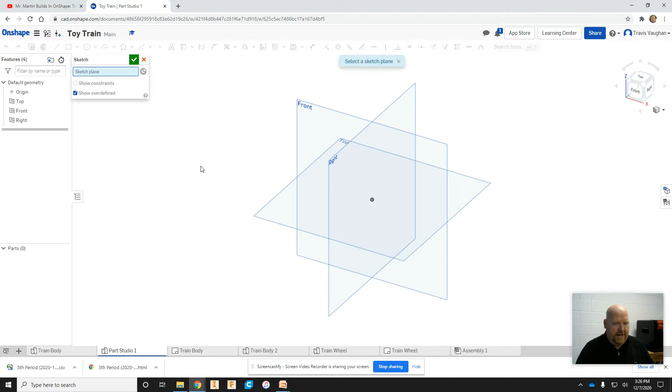Okay, so this is our part studio. This is how it's going to launch. And the first thing we're going to do is we're going to hit Shift S to start a new sketch. We're going to choose our front work plane, and then we're going to swing around our front view cube or our view cube to the front view.

All right, let's jump over here to the train body, the drawing. Sorry, had to reload it. So here we go. So first things first, I am going to draw the outline of my train body first.

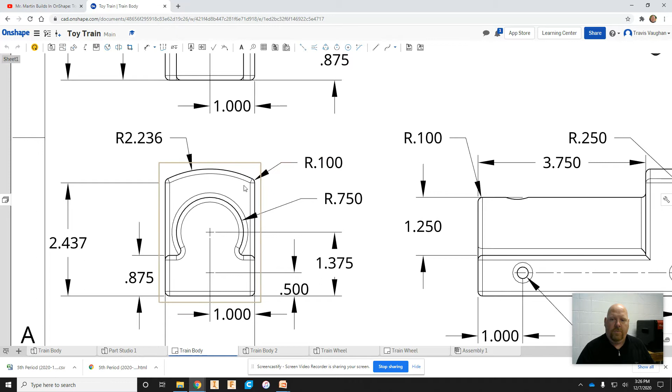All right, so now the dimensions that I'm going to use are not fully going to match what is on this drawing because, as you can tell, there's a radius here of 0.1 that's telling you that fillet there is 0.1 inches, and that is going to affect this measurement right here, okay, because this one is 0.1 as well, which means that this is really 2.5, not 2.437. It will end up being 2.437 once we add the fillets, but for the time being, when we're drawing it, we're going to draw it as 2.5.

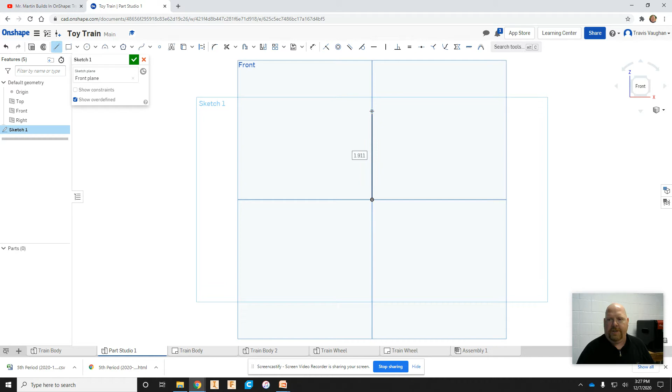So 2.5 up and down, 2 inches across, another 2.5 up, and then we'll add the arc at the top. So I'm going to grab my line tool by choosing the letter L on my keyboard, starting at my center point, and I'm going to go straight up that center line. Don't have to go far, just enough to get it started, and then I'm going to type in 2.5, and it's going to set my line.

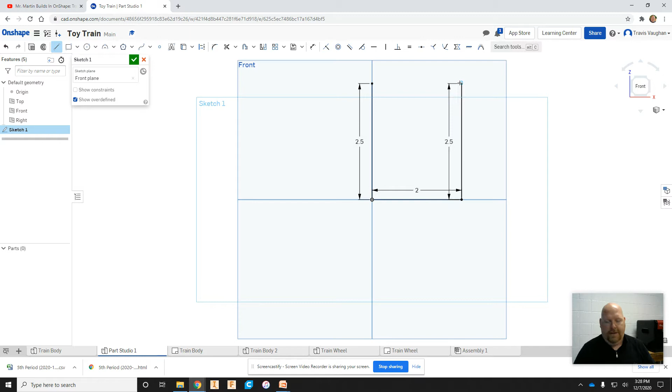I'm going to choose my line tool again to get rid of it, and then I'm going to grab down here at the bottom. Make sure that your center point turns yellow to let you know that you are connecting the dots. Go straight across. I'm going to make that 2. I'm still in my line tool, so I'm going to go straight up until I get around 2.5, and then I will type it in, 2.5. Hit escape to get out of my line tool. I'm going to drag this down.

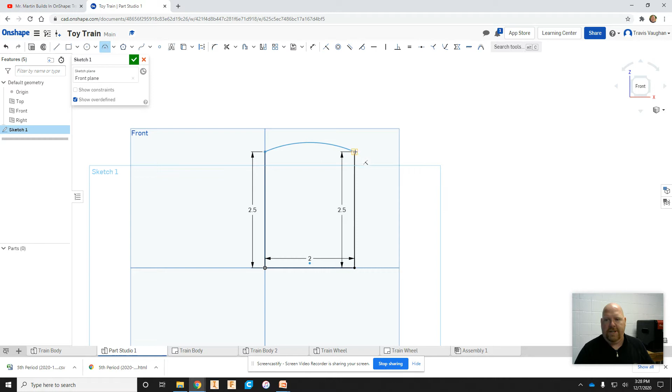Now what I want to do is I want to create the arch that goes across the top. So I'm going to hit the letter A to choose my center point arc. Excuse me, my 3-point arc. That's what we want, 3-point arc. And I'm going to choose this as my first point. I'm going to choose this as my second point, and I'm just going to drag it to right about there, hit escape, and now we've got our general shape, but I need to make sure that I'm exactly like my drawing.

So this point here is my 3rd point. So I'm going to come back over to my train body diagram, and I'm going to look, and I'm going to be able to see that this center point is connected to my arc. Okay, and it tells me, according to this drawing, that that center point is 0.5 inches from the bottom of my train. So I'm going to come back over here.

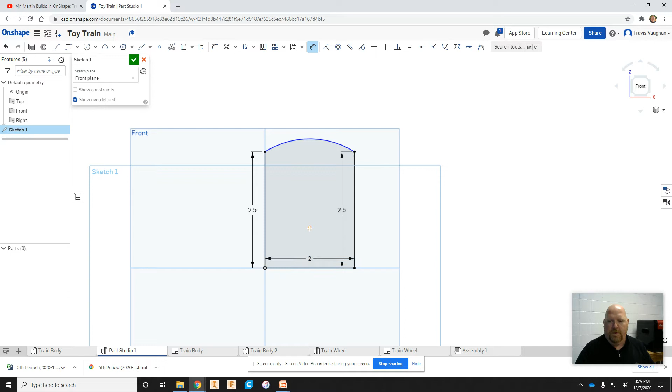I'm going to choose the letter D on my keyboard, and I'm going to dimension from that center point to the bottom. I'm going to pull it out here to the right, and I'm going to tell it 0.5, and it is going to set it. And now my arc is the shape that I want it to be.

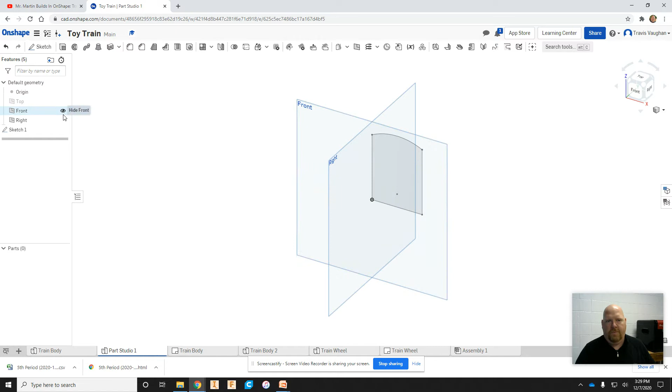We are done with this shape, so I'm going to finish my sketch. I'm going to go into isometric view, and then I am going to get rid of my work planes because I won't need them anymore. And I'm going to extrude, so I'm going to click extrude, and I'm going to click that.

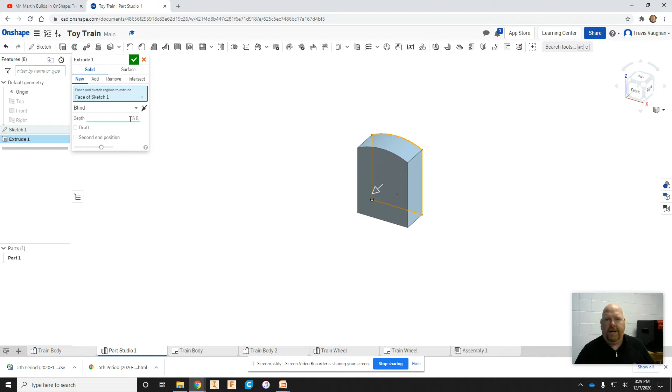If you paid attention just a minute ago, you would have noticed that the length of our train is 5.5 inches from front to back. So I'm going to tell it I want it to extrude 5.5, and I want it to go this direction instead of coming towards me. I'll click the opposite direction button, sending it backwards instead of forwards. This is the direction I want it to go, so I'll click that and then click OK. We are done with that part of our train body.

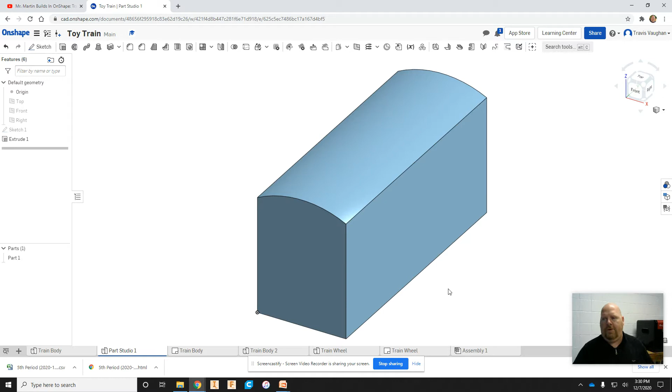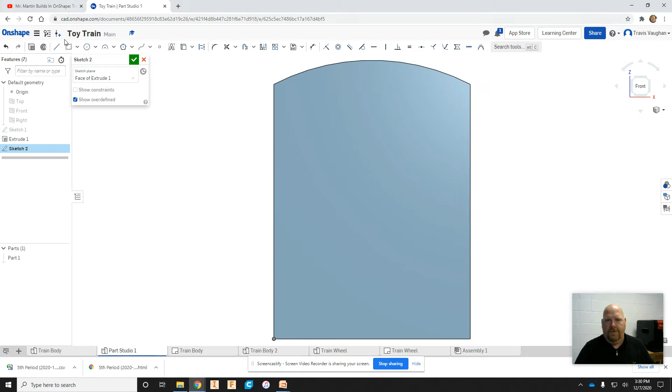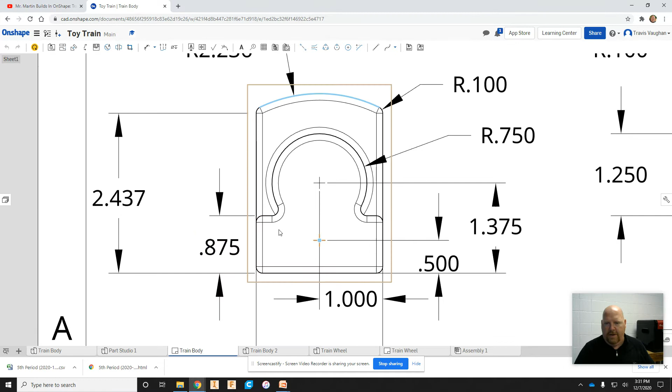I'm going to draw a line, choosing my line tool, and just draw a line straight across from one side to the other. It doesn't matter where, because I'm going to dimension it anyway, so I'll hit escape. I see that the height is 0.875 - if I zoom in from the top or middle of my train down to the bottom, it's 0.875, which is what I want. I'll click dimension, choose the line we just drew, choose that bottom line, and when it turns yellow, enter 0.875. Now we're good to go.

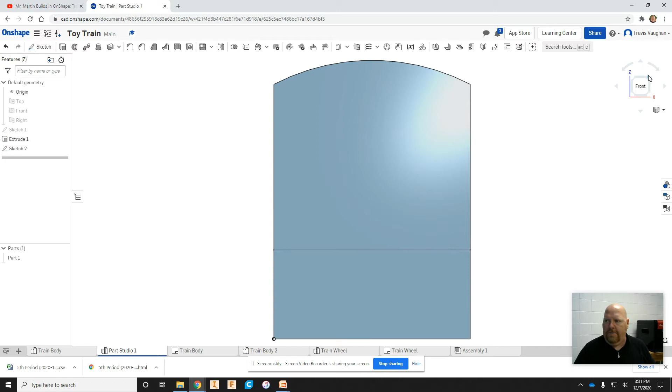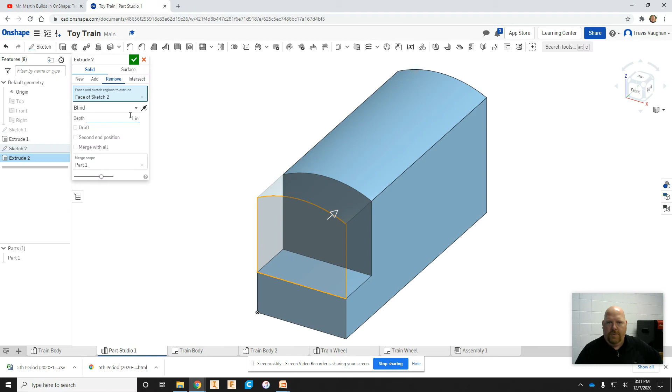Hit finish sketch. I'm going to slide over here, send it into isometric, and extrude this. Instead of add, I'm going to remove, but I need to know how much material to remove, so I'll come back to my drawing. 3.75 inches is how far it is from the front part of my train back to this wall. So when I extrude, I'm going to tell it to cut away 3.75 inches of material. I'll hit enter, and we are now starting to look like we have a train body.

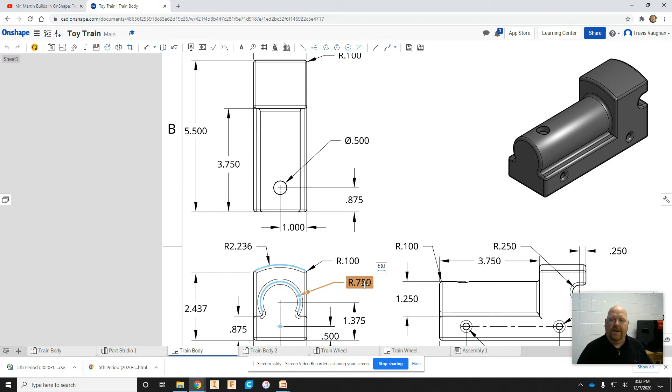Go back to isometric, come back over here, and it's time to build the steam chamber. Looking at my steam chamber, the first thing I notice is it's a circle, but not just a regular circle - right now I'm given a radius. Remember, when we're drawing circles, we have to draw diameters, and a diameter is equal to 2 times the radius. So if our radius is 0.75, then our diameter is going to be 1.5 inches.

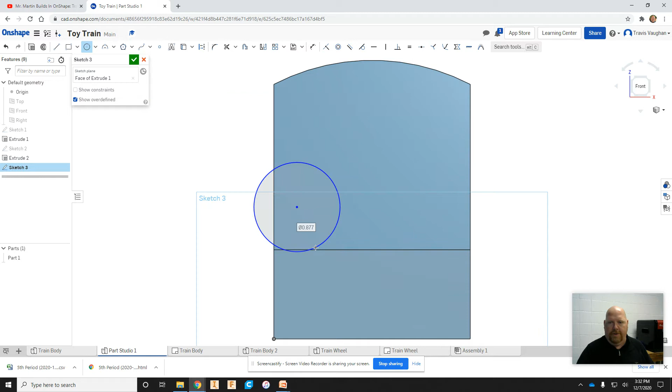We're going to draw a circle, but first we'll start a sketch, choosing the front of my train again. Then I'll click the front of my view cube to spin it around, and draw a center point circle. It doesn't matter where I draw it, because I'm going to tell it where to go anyway, so I'll draw it and tell it to be 1.5 inches in diameter. Now I'm going to set up where I want it.

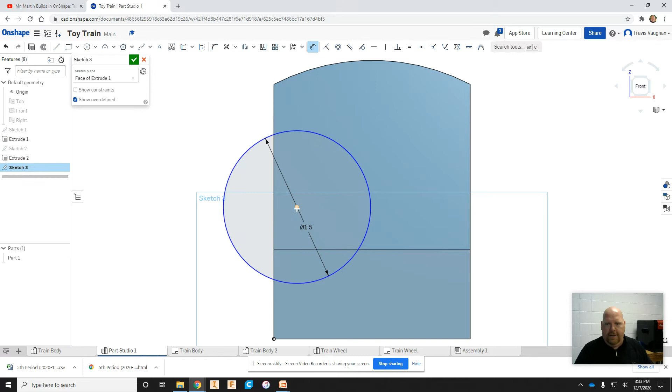According to this, my center point of this circle is 1 inch from the side of my train. So I'm going to click my dimension key, go from the middle over to the side, come out and tell it 1 inch, and it's going to automatically center that thing up for me.

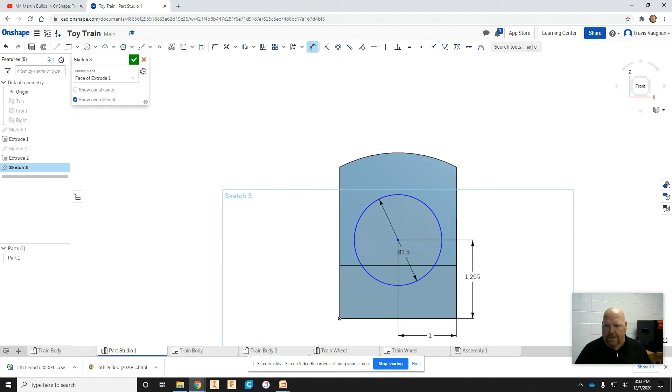Now, how high does it need to be? Well, according to this, it's 1.375 inches from the bottom of my train. So again, I'll click my dimension tool, center point, bottom line, come over to the side, and enter 1.375. Let me double check that... yes, that's what we want. Once we've got that, we can click Finish Sketch because we are done drawing our circle.

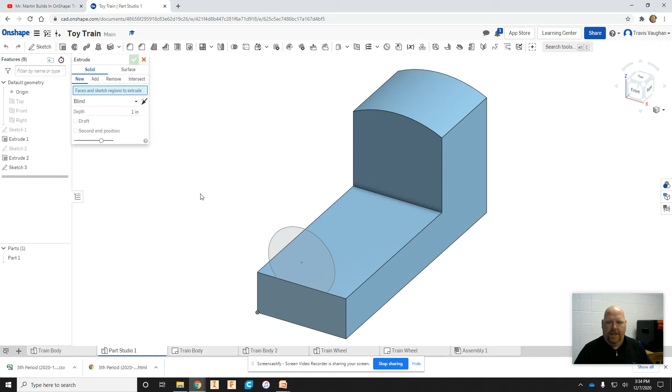I'm going to spin it back around into isometric mode, and now I want to create my steam chamber. So I'll click Shift E for my extrude, and select that circle that we just created.

I'm going to tell it to go the opposite direction because I want it to come back and hit this wall, but I want it to stop there. So instead of choosing blind, I'll tell it up to next. It's going to get to that wall and stop, and I'll hit OK. Now we have a pretty good looking train body so far.

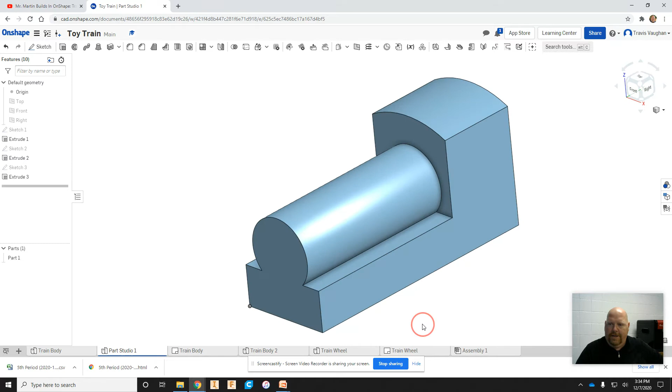This next step isn't complicated, but it could be the most confusing. The next thing I want to do is draw the hole for my smokestack. This is where my smokestack is going to be inserted.

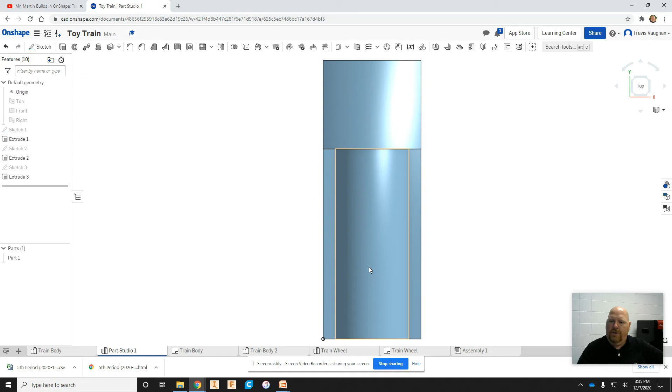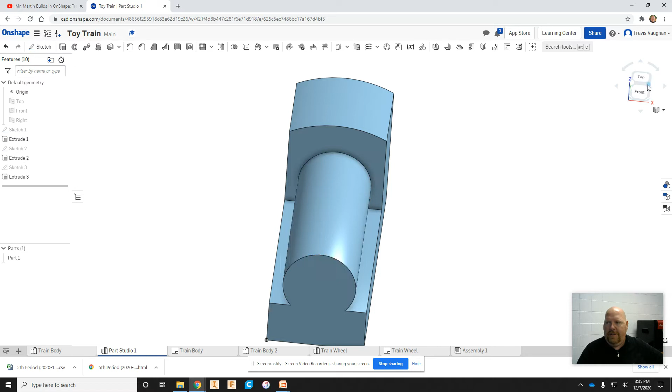If I come over here and grab the top of my view cube and tell it I want to create a sketch on this surface, the problem is if I spin this up a little, you'll notice that depending on where I click on this top, while it looks like a rectangle, I'm actually clicking at a different height depending on whether I go left or right, because it's a cylinder, not a rectangle. So I need to give myself a flat surface to draw or sketch on.

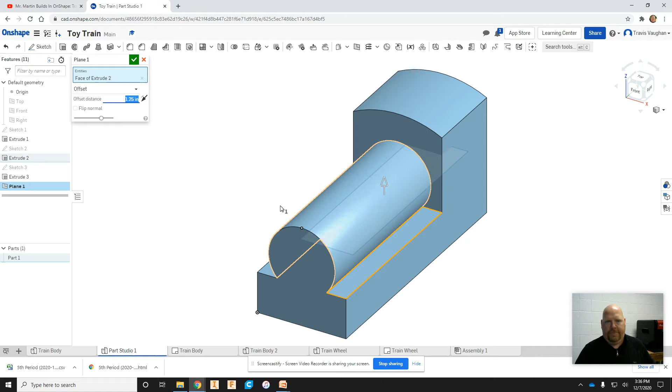So I'm going to create an offset work plane. I'll choose my plane tool from up here at the top, then come in and click on this flat surface right here. When I do, it's going to create this work plane, but I want to make sure it is at the top, 1.25 inches from the top of my cylinder. I'll click the checkbox.

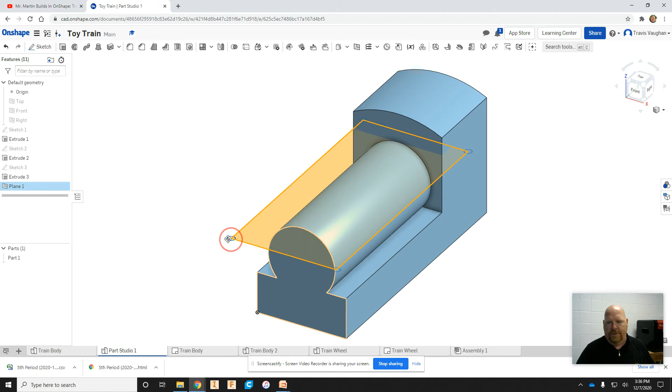Now I need to make sure this plane is big enough that I can see it and grab it, and make sure my sketch goes on there. So I'll choose my work plane, Plane 1, from my features panel, grab that corner, and drag it out. I'll do it again down here until I get a nice big orange square. That will allow me to make sure I select the plane I want when I create my sketch. So I've got my work plane created.

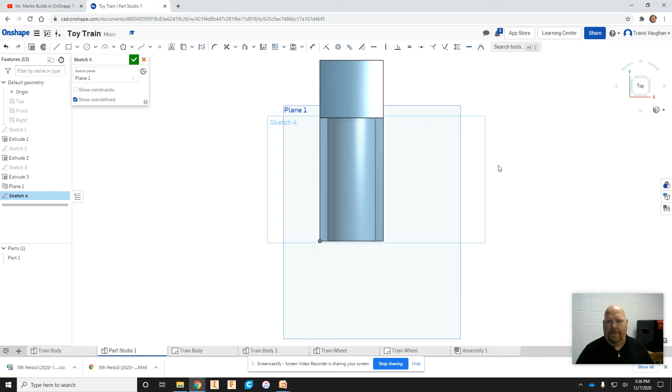I'll click Shift S, click on that work plane, and flip over to the top view. Now I'm ready to draw that circle for my smokestack.

I can see that the diameter of that smokestack is 0.5 inches. So I'll click C for my center point circle, drag it, and set it to 0.5. Now I need to dimension it and put it where I want it to be.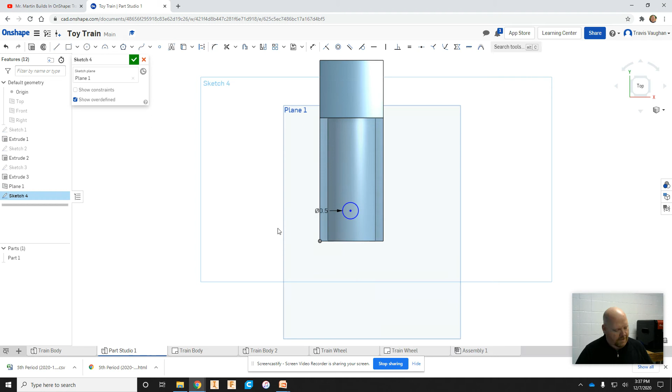I know it is 1 inch from the side and 0.875 inches from the front of the train. I'll start with the 0.875 since it's going to be the hardest for me to remember, so I'll dimension it from there to the front as 0.875.

And from that center point over to the side of my train is going to be 1 inch. It is completely centered up. It's exactly where I want it.

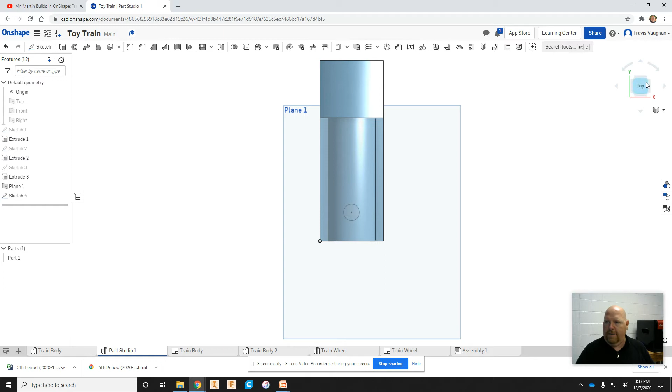I'll hit my check mark, then send it into isometric mode. I'm going to extrude it down inside and tell it to remove 0.25 inches of material. That's the one thing on the dimension drawing I wasn't able to show you — I know how to do it in Inventor, but I haven't figured it out in Onshape yet, so that's why I'm giving you that dimension instead.

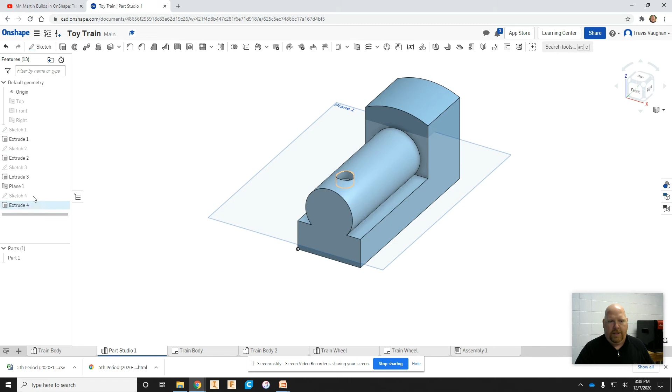So we have that done, it's where we want it. Now we're going to make that work plane invisible so it's not in the way anymore, and we need to cut three more holes.

We're going to cut these two holes in the side, then cut this hole in the back. We'll start with these two holes in the side — we can tell the diameter of both is 0.25 inches. So I'll grab over here and start a sketch with Shift S, starting it on the side of my train, flip around to the right side, zoom it out a little so I can see what I'm doing, and draw two circles.

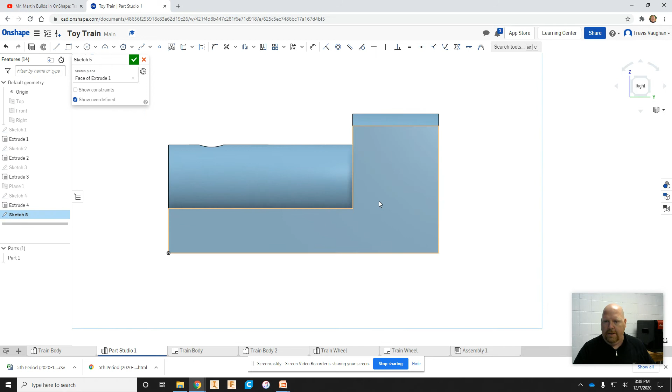All right, 0.25 inches. Doesn't matter where, because we're going to tell them where to go anyway. Looking back at our train body diagram, I can see that there's a center line running between these two circles, and that tells me that they are both 0.5 inches from the bottom of the train. So I'll come over here, hit my dimension key, and grab that, go to the bottom of the train.

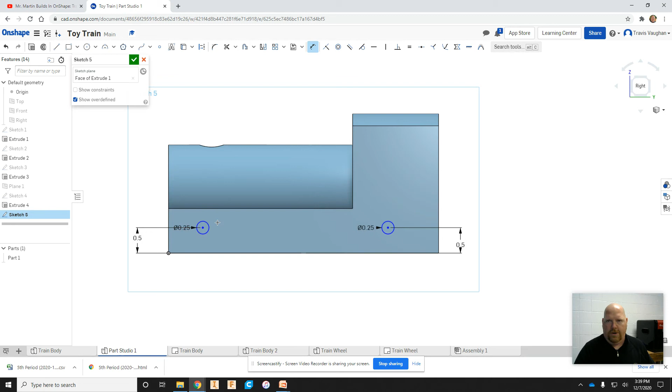0.5. Same thing with this one back here to the bottom of the train, 0.5 inches. And I look at my train body one more time, and I recognize that this front circle is 1 inch from the front, and the back circle is 1 inch from the back. So staying with our dimension tool, front circle to the front of the train, 1 inch. Same thing on the back.

Back circle to the back of the train, 1 inch. And we're done. Now let's go ahead and draw this circle up here as well, because it's going to go all the way through. So let's look at our train body one more time.

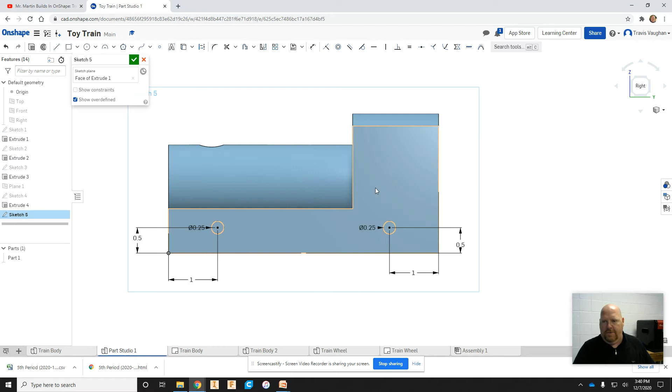And if you notice, we have a radius for this circle. And the reason is because it's not a complete circle. Okay, so when we have a radius and we're drawing a circle, we're going to double this. So a radius, in order to turn it into a diameter, you double it. So instead of 0.25, it's actually going to be 0.5. So I'm going to come back over here. I'm going to draw one more circle up here, and I'm going to call it 0.5.

And that's perfect. Now, I want you to notice one more thing, and that is it's not just a circle, okay? It extends all the way out. So the way that we're going to cut out the rest of this material is we're going to draw a couple of lines. So I'm going to choose my line tool, and I'm just going to draw a line up here. As long as it's a straight line, it doesn't matter how long it is or anything else.

So I'm going to draw a line above and a line below. They're going to be nice and straight. You're going to notice that they have a dashed mark. That means that they're straight lines. Now we're going to use our tangent tool just like we did when we were building our pear cams. I'm going to hit the letter T. I'm going to select my top line. I'm going to select the outside of my circle, and it's going to move. Then I'm going to select my bottom line and the outside of my circle.

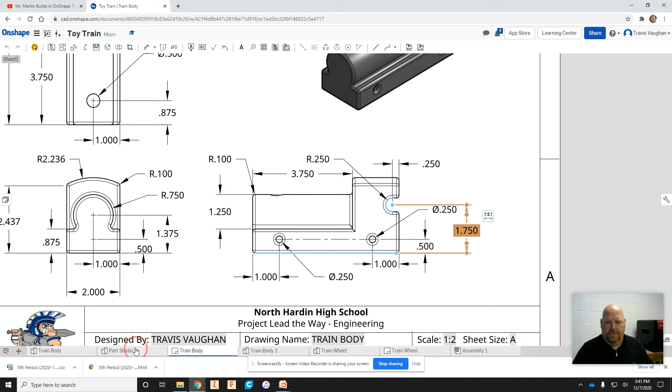All right. So we're getting to where we want to be, but I need to make sure that my circle is in the right spot. So let's look back at our train body diagram. And according to this, the center point of my circle is 0.25 inches in from the back and 1.75 inches up from the bottom. So grab my dimension tool, and from here to the back of the train was 0.25 inches. And from here to the bottom of the train was 1.75 inches.

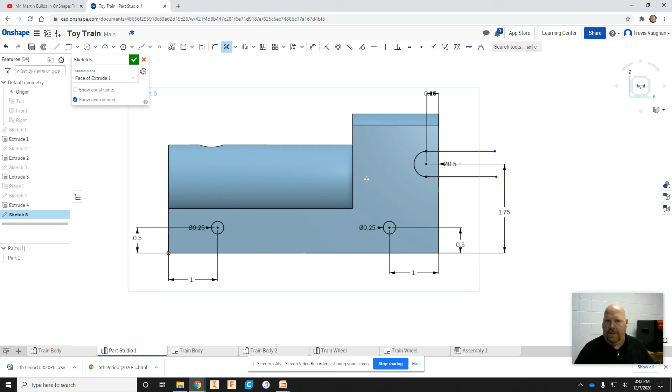Now I'm ready to trim this up and start extruding. So I'm going to choose my trim tool by clicking the letter M, and I'm going to get rid of this line and this line because I don't need those. And I'm going to get rid of this half of the circle because I'm getting rid of all of this material, not just the circle part. These two lines, I'm going to leave them alone because they're going to just go away here in just a second. So I'm done. Click Finish Sketch.

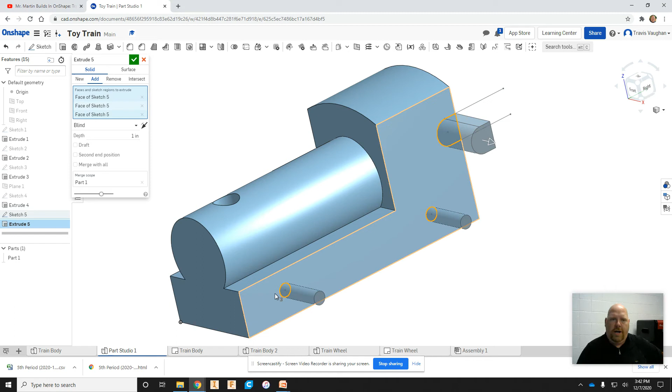Throw it into my isometric mode. All right, I'm going to zoom in just a little bit, and now it's time to start extruding. So I'm going to click Shift E, and I'm going to choose this piece. I'm going to choose this circle and this circle. And if you notice it's trying to add material to all of them, I'm going to tell it to remove. And I'm going to tell it to go all the way through. And by doing so, it cuts a hole all the way through my part, which is exactly what I want. And I'm going to hit that checkbox, and my train body is created.

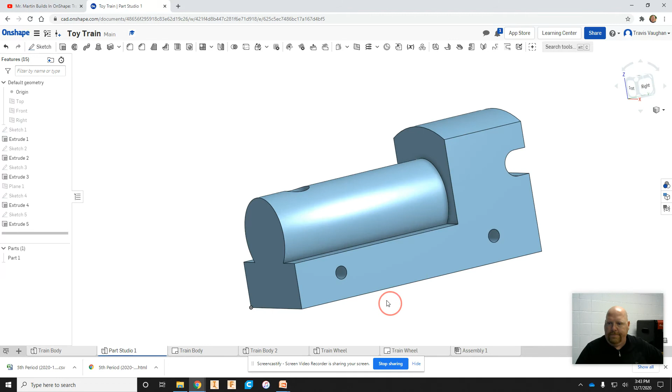You have officially created your train body. Now, there's a couple more steps that we need to do. First of all, one of the things we want to do is we want to be able to 3D print these. Okay, so our 3D printers use a material called PLA plastic. So we have to tell our model what it's made of. And the way we do that is we come over here to part number 1.

We click on it, and it highlights our whole part yellow to show that we have selected it. We're going to right click on part number 1 and choose Assign Material.

When you assign the material, it's going to ask what kind of material you want. Right now it has none applied, so we'll click on that drop box and scroll down until we come to PLA. We're going to select that.

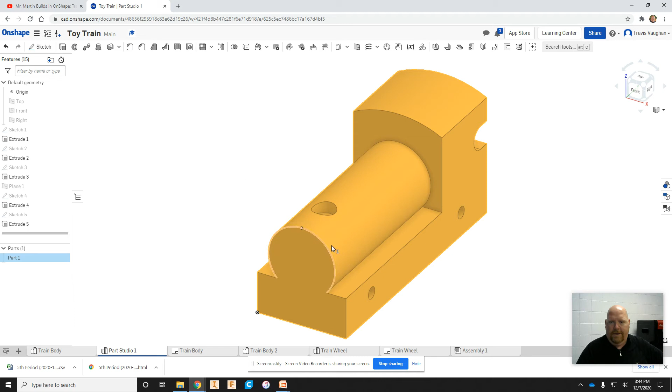We have PLA now, and it tells us our density is 0.045 pounds per inch cubed. That doesn't mean a whole lot to you, but it means stuff to the computer and the 3D printer. So we click the checkbox, and you'll notice it doesn't change anything about your part visually—it just changed some stuff in the background programming.

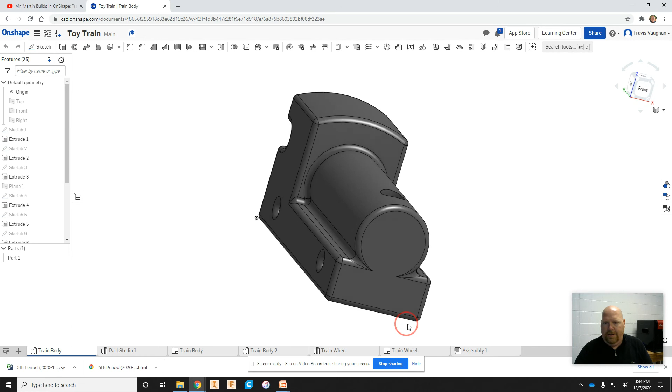The next thing we want to do is get this to the color—actually, we're not going to change the color yet, we're going to add one more detail. On my train body that I created, notice there are no sharp edges, except one right here for my smokestack, but everything else has been smoothed out.

So the last step before changing the color is to add some fillets. Your fillet tool is right up here—you can click on it or press Shift F. When you do, it opens your fillet menu, and you want to change this from 0.2 to 0.1. I'll type in 0.1 and hit enter.

Now I'm going to do this systematically. I'll do all of one side, then flip around and do all of another side, and so on. Making sure I have 0.1, I'll start with the front of my train.

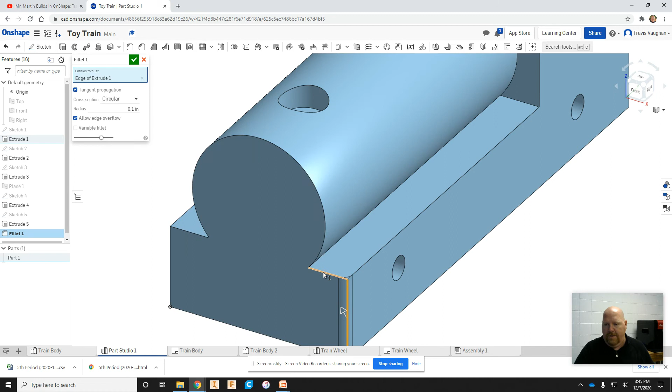I'll zoom in here a little bit. I'll grab this corner, click it, and it automatically fillets it. Then I'll grab this corner, and it fillets that too. I'll spin it around, grab this bottom corner, and it fillets that. Same thing on this side—click it, it fillets. Then I'll add one more right here. Now I've filleted all of that.

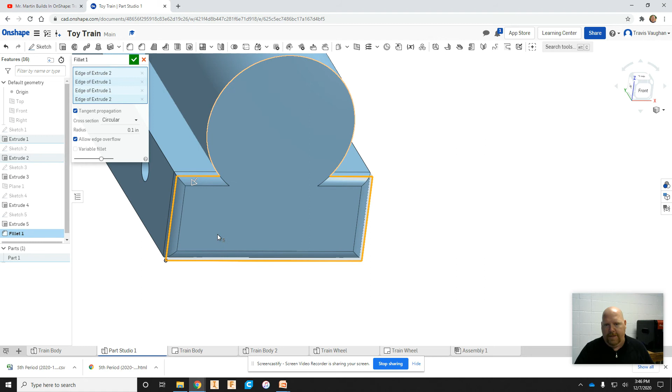Now I'm going to do this arch right here. I click it and it gives me a nice round front edge. The front of my train is done. I'll zoom out a little so I can see it—I like the way the front edge looks. So I'll hit the checkbox.

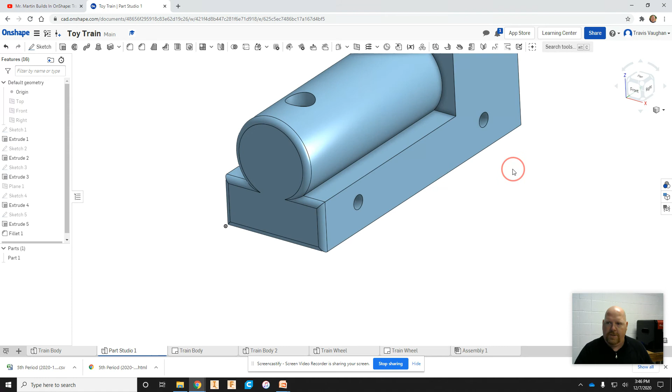Now I'm going to move to the side. I'll start by doing this side here. I'll choose my fillet tool again, Shift F, double check that I still have it at 0.1, and start doing my edges. You don't want to get the whole thing—if I click right here, it's going to mess everything up. So I want to make sure I'm only selecting one edge at a time.

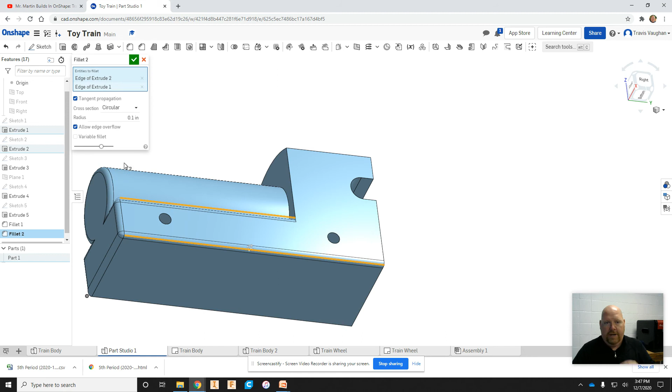So I'll choose this one first, then flip it up just a little bit so I can see the bottom edge, and grab it. Click—that's 2—and you'll notice every time I click something, it adds it to my fillet. That way, if I ever have to go back and make changes, I can make changes according to what I did. So I'll be very meticulous in how I do it.

So now I'll choose this corner, and then this corner. You're going to go around, and you don't have to click the same corners in the same order as I do, but you do want to get all of your corners.

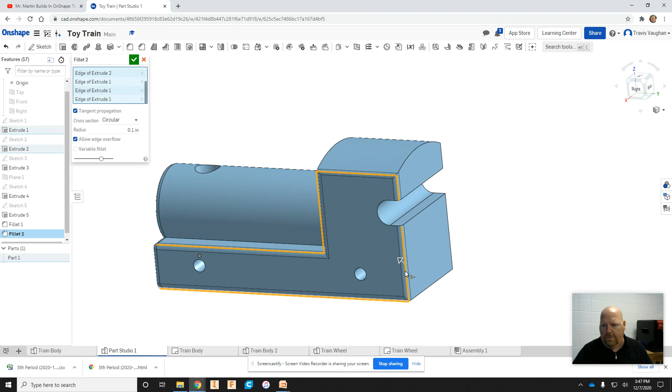Now watch this—when I get here, I'll zoom in a little bit. I'll click this right here, and it automatically does the entire thing. That was nice and handy. I like that. This side is looking really good, but the last thing I'll do is go ahead and do these 2 wheels.

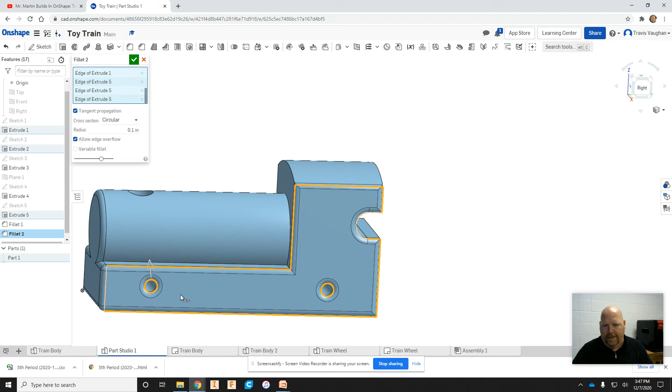All right, so I've got this whole side done and my wheels. I'll hit the checkbox. Now I've got my front side and this side over here. So I'm going to spin around and I'll do this side next.

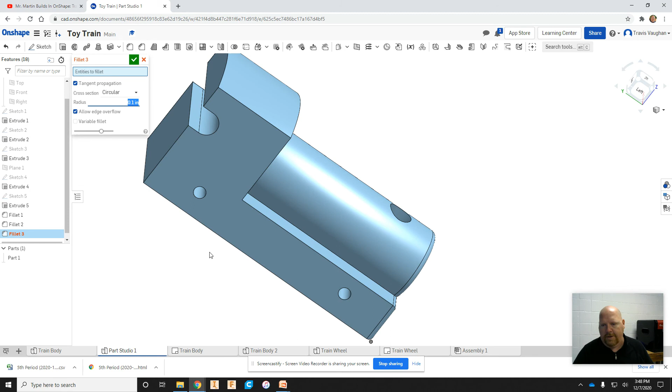Choose your fillet tool, Shift F, double check that it's 0.1 in radius. As soon as you've got that, you can start going in and doing your filleting. So I'm going to start with this corner again, then spin it up a little bit and grab this bottom corner, spin it around. The way I'm spinning this around is using the right button on my mouse.

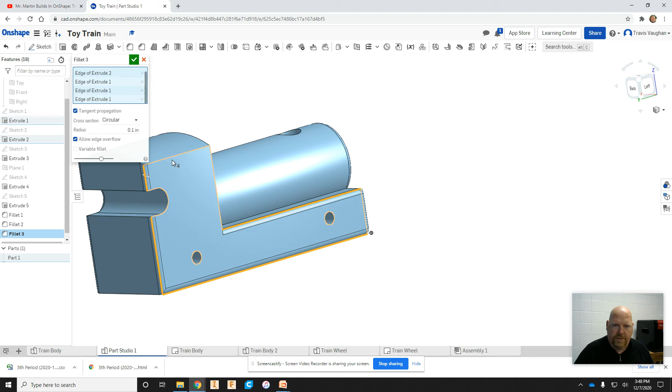I click it and hold, and that allows me to spin my part. So I'll choose this one, this one, this one. I'll spin around to make sure I'm getting this front right here. Then I'm going to spin around, zoom in so I can see that I'm grabbing this corner here, and it's going to fillet that whole edge.

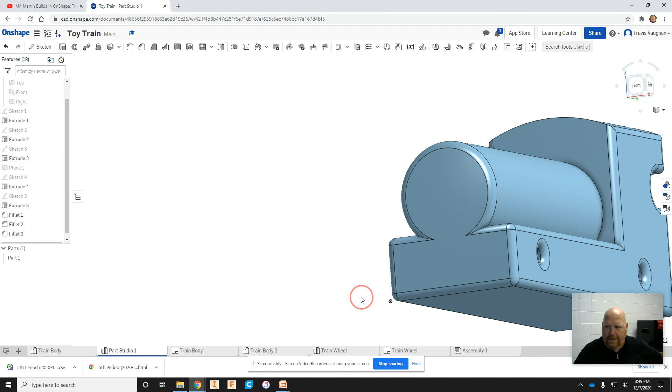And I can zoom back out, and now I can see that I've got the right side, the left side, and the front. Now I'm going to go ahead and do the top, this part up here.

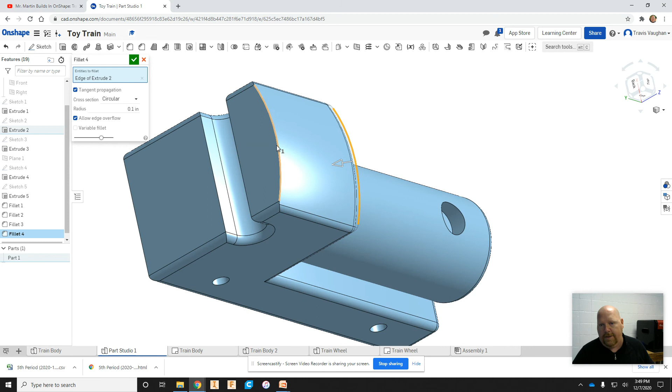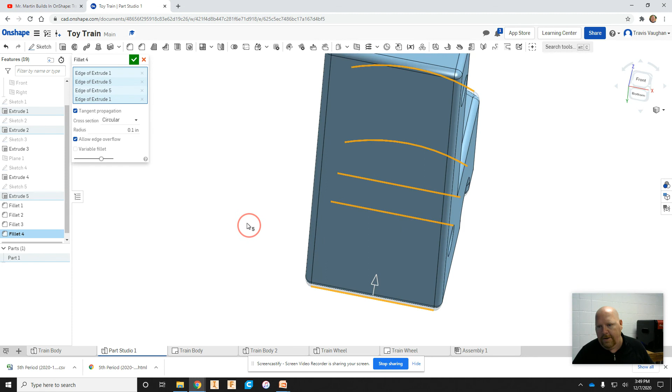Choose my fillet tool again, Shift F, change it to 0.1, and get this edge here, spin it around, get this edge here, spin it one more time, make sure I'm getting this bottom edge, so I'll click that. And I want to get this edge because I haven't gotten it yet, and I haven't gotten this bottom corner, so I'll get it. So now I've got this whole front, whole top underneath.

I should have done this earlier - I'll go ahead and grab this wheel and this wheel. And when I hit the checkbox, I now have it almost fully filleted.

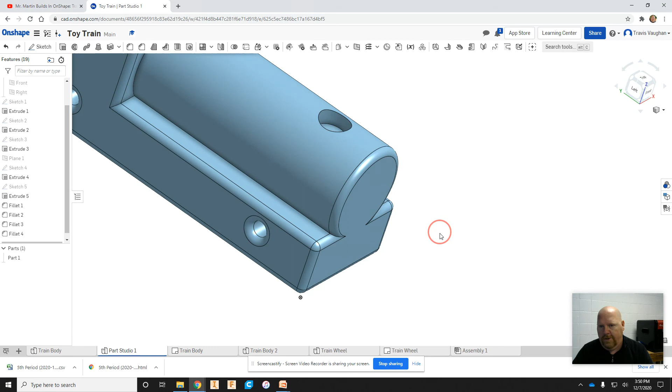The only thing I haven't done yet is this corner here. I haven't done the back corner or this corner over here. So we'll go ahead and do that now, and you're going to see it kind of changes everything just a little bit. Okay, let me center this up a little bit.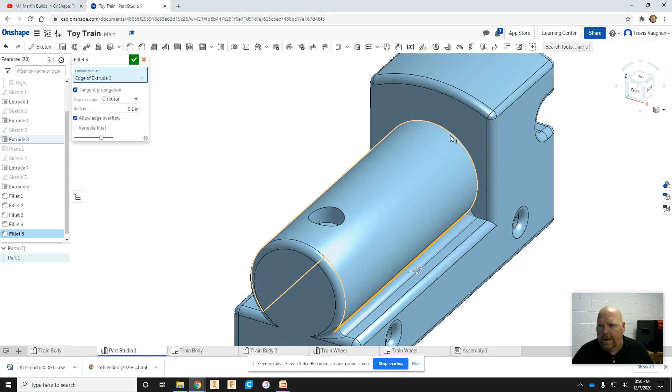All right, Shift F, change it to 0.1. I'm going to slide in here, grab this corner, zoom out, come back here, and I'm just going to grab that right there, spin it around a little bit. You notice that went all the way around.

And now I'll grab this corner right here, and it fillets that nice. So now I have nice smooth edges everywhere.

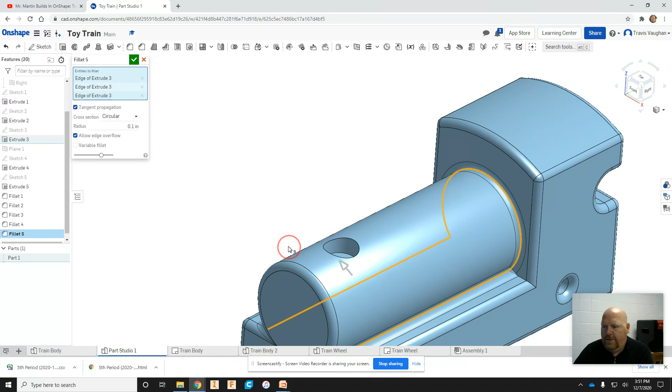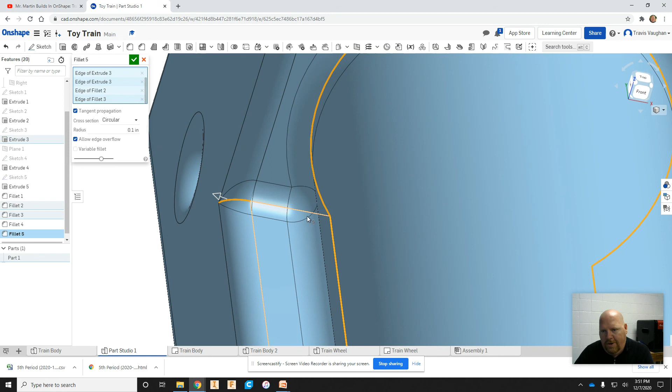Okay, now I do see one edge that it didn't quite get. So I'll zoom in right here, and if you notice, there's still kind of a sharp edge here. I'm going to grab this, click right here, and it's going to fillet that whole corner. I'll double check the other side, and it did the exact same thing. So I'll zoom in again, click the same edge, and it's going to go all the way across and give me a nice smooth edge.

And now, click my finish sketch, and I will spin this around to make sure I didn't miss any of my edges. And this looks really nice.

So the last step is we're going to change the appearance. I do not want to fillet this right here because we're going to have an insert there that I don't want rattling around. My axles, when they go through here, will cover up those holes, so that's why we're not putting anything there. We can go ahead and fillet those other edges.

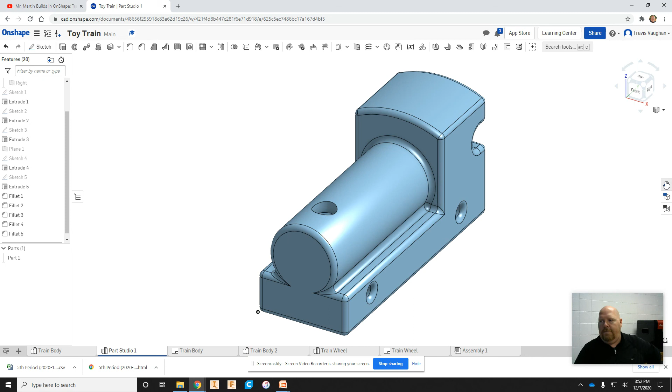All right, so let's change the appearance. You click the appearance panel over here, it's going to pop out. You've got this nice blue color - you can change this to whatever color you want your train to be, depending on who you're creating it for. I went with kind of a normal train color, a blackish gray, when I created mine. It's going to give it a nice shiny tint to it.

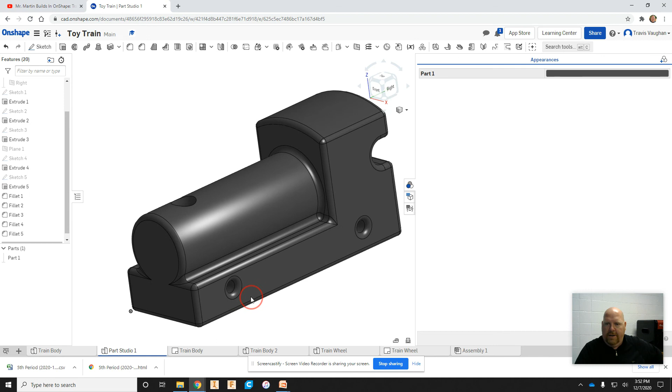Close that, put it in isometric. The last thing you want to do is right click down here on your Part Studio. Make sure you name this and call it Train Body - I'll call mine Train Body 3 because I've already created this a few times. All right, you just call yours Train Body, hit enter, and it is saved.

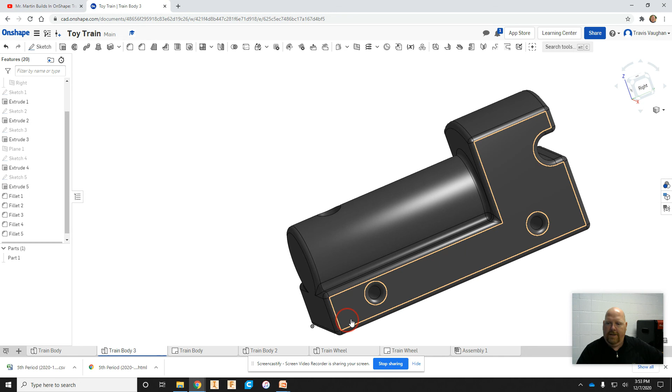And now I can go in and view and make sure everything is correct. I can go in and double check your parameters. And as long as it's in that NTI, or in your toy train folder that's in your NTI folder, I can go in there and give you credit for creating this.

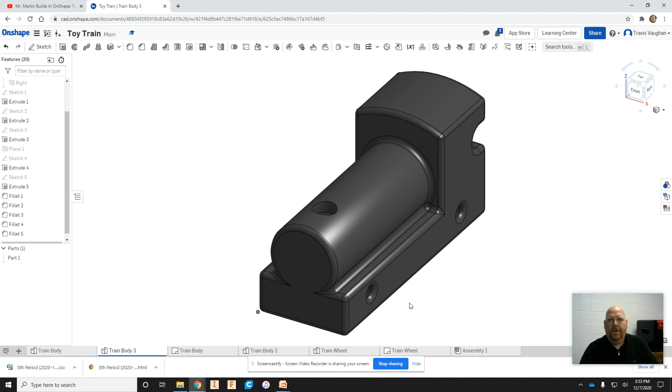So that is how we create the toy train body. Like I said, pause, rewind, do it over as many times as you need to get it right. And tomorrow we will jump into creating the wheels. Hope you enjoyed this.